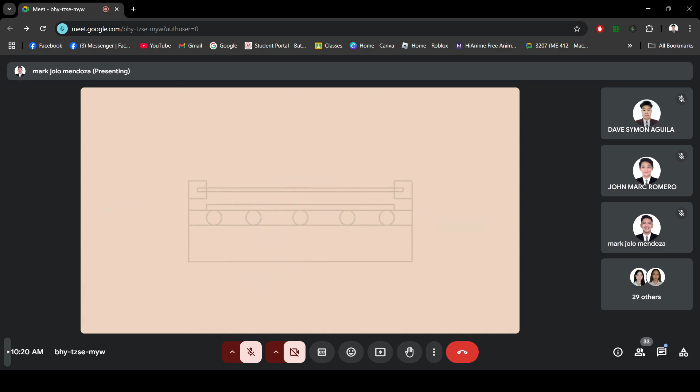Here is the video about flat plate solar collectors. The flat plate solar collectors are probably the most fundamental and most studied technology for solar powered domestic hot water systems. The flat plate collector is basically a heat exchanger, which transfers the radiant energy of the incident sunlight to the sensible heat of a working fluid, liquid or air. Here the main components of the flat plate collector are black absorber plate, transparent screen, fluid tubes, insulation, support structure.

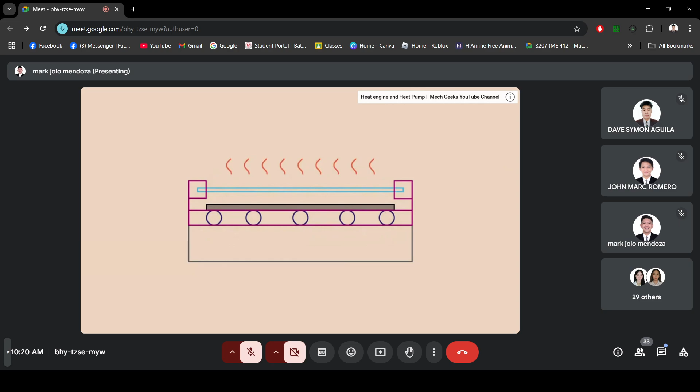Sunlight passes through the transparent screen and strikes the absorber plate, which heats up, changing solar energy into heat energy. The heat is transferred to liquid passing through pipes attached to the absorber plate. However, the rest of the energy is still lost in radiation to the outside environment. Flat plate collectors heat the circulating fluid to a temperature considerably less than that of the boiling point of water, and are best suited to applications where the demand temperature is 30 to 70 degrees C.

That's it guys for this video. Hope you understand our explanation. If you liked our video, please give thumbs up, share this video to your friends, express your views in the comment section below. And also watch our previous videos. For more content, make sure to subscribe to our channel and hit.

So, yun. That is the very simplest definition ng flat plate collectors natin. That is how it works. So, we're gonna be dealing more about it later on. And another thing that we are gonna be discussing is our concentrating solar power systems.

And one of those, kung mapapansin nyo sa module, if you check the module, by the way, si Adam, your module is with me na here sa faculty. So you need to get this, Adam, because next week we are going to be having our quiz, and half of the items in the quiz will be on your module. So if you have time, then you can get it here sa faculty.

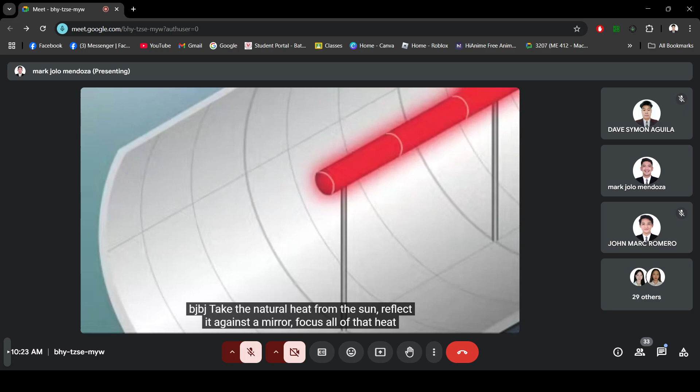Okay, take the natural heat from the sun, reflect it against a mirror. Focus all of that heat on one area, send it through a power system, and you've got a renewable way of making electricity. It's called concentrating solar power, or CSP. Now, there are many types of CSP technologies: towers, dishes, linear mirrors, and troughs. Okay, have a look at this parabolic trough system.

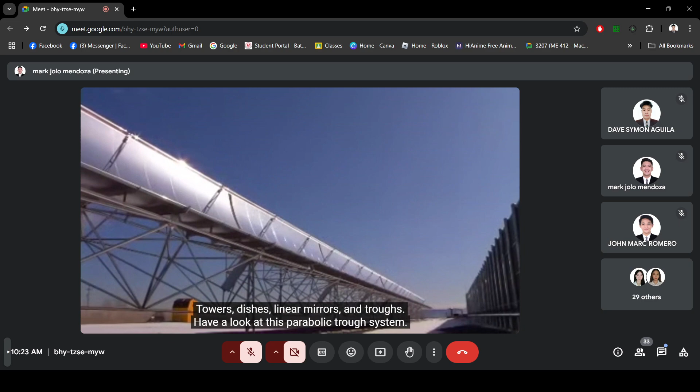Parabolic troughs are large mirrors shaped like a giant U. These troughs are connected together in long lines and will track the sun throughout the day. When the sun's heat is reflected off the mirror, the curved shape sends most of that reflected heat onto a receiver. The receiver tube is filled with a fluid. It could be oil, molten salt, something that holds the heat well.

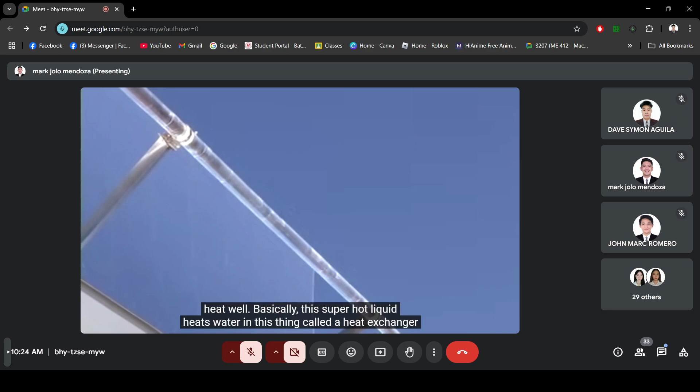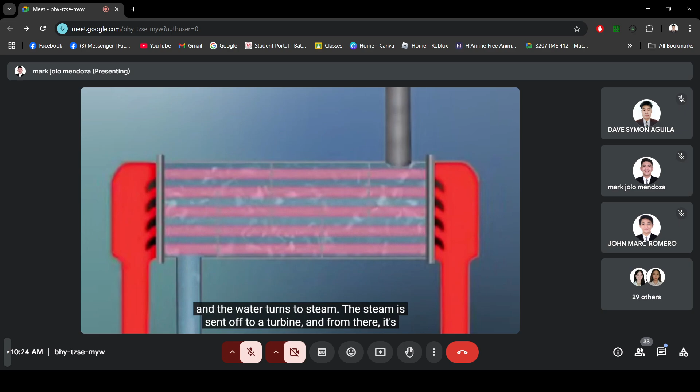Basically, this super hot liquid heats water in this thing called a heat exchanger, and the water turns to steam. Now the steam is sent off to a turbine, and from there, it's business as usual inside a power plant. A steam turbine spins a generator, and the generator makes electricity. Once the fluid transfers its heat, it's recycled and used over and over, and the steam is also cooled, condensed, and recycled again and again.

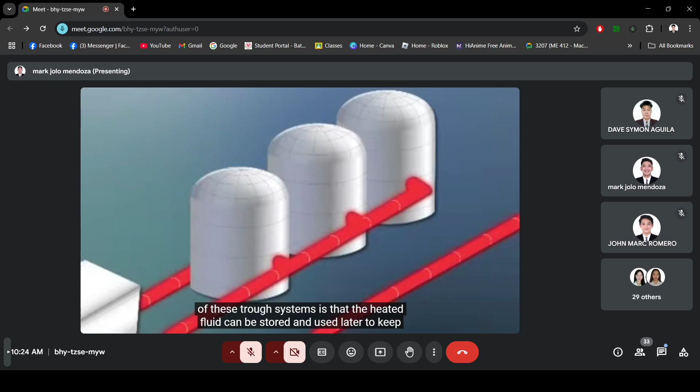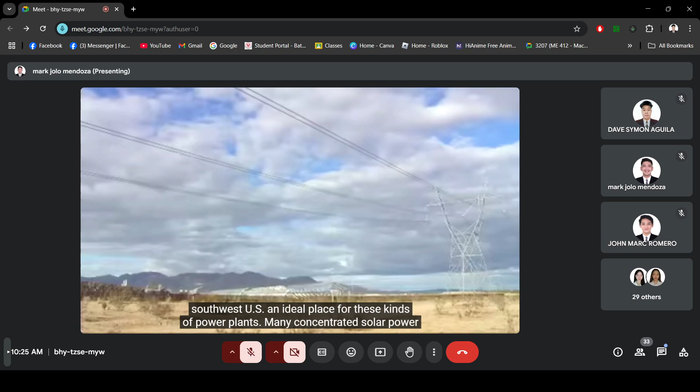One big advantage of these trough systems is that the heated fluid can be stored and used later to keep making electricity when the sun isn't shining. Sunny skies and hot temperatures make the Southwest U.S. an ideal place for these kinds of power plants. Many concentrated solar power plants could be built within the next several years, and a single plant can generate 250 megawatts or more, which is enough to power about 90,000 homes. That's a lot of electricity to meet America's power needs.

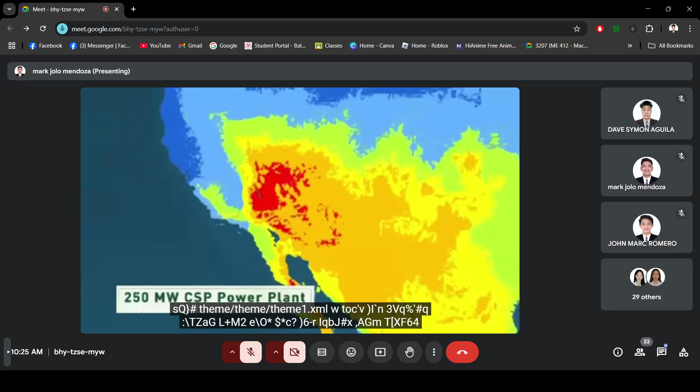So yun, that's another type. That's an example of a concentrating solar power, specifically parabolic trough system. And another type is CPC, or the compound parabolic concentrators. So ito yon.

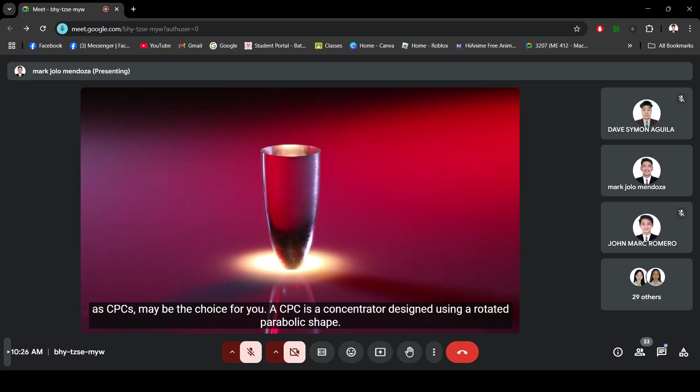Want to collect and concentrate divergent light while avoiding the difficulties associated with a multi-element system? If so, compound parabolic concentrators, known as CPCs, may be the choice for you. A CPC is a concentrator designed using a rotated parabolic shape. The wide end of the CPC collects divergent light, which is then reflected within the CPC and concentrated at the narrow output end. CPCs are defined using an acceptance angle, which is the angular range in which a CPC can collect light.

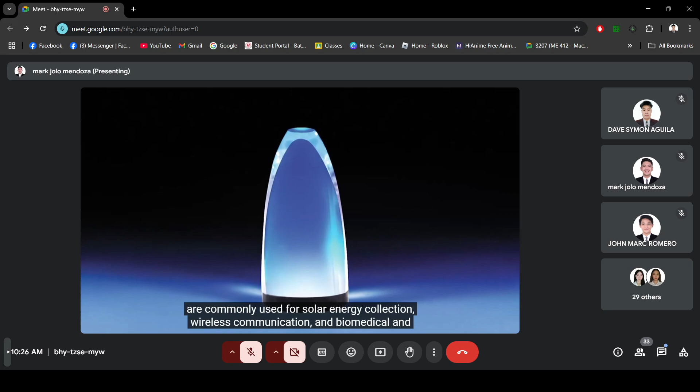CPCs are ideal for any application that requires the condensing of divergent light sources and are commonly used for solar energy collection, wireless communication, and biomedical and defense research.

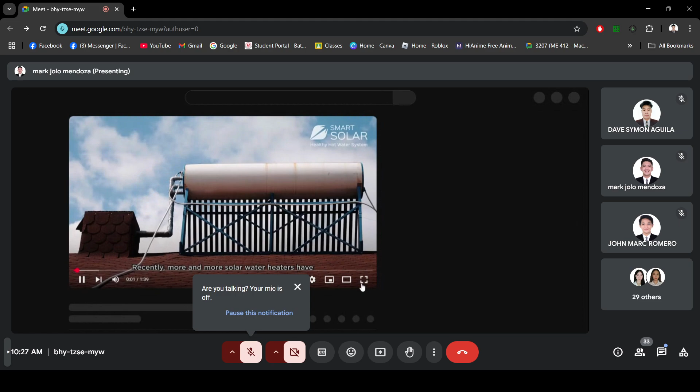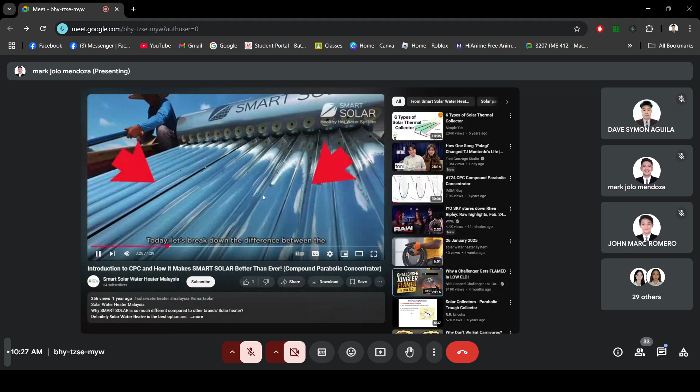Recently, more and more solar water heaters have adopted the new evacuated tube technology, a wonderful piece of tech that improves the efficiency of acquiring hot water for your home. But there's a catch. When you are choosing the right solar water heater for your home, make sure to check if it comes with a CPC. Today, let us break down the difference between the evacuated tubes with and without a CPC.

CPC stands for Compound Parabolic Concentrator. It is the curved sheet of metal placed beneath the evacuated tubes. For evacuated tubes without a CPC, the sun rays can only be absorbed from the surfaces facing the sun, leaving more gaps between each pipe and reducing the amount of heat generated. With a CPC, the evacuated tubes continue absorbing the sun rays from all around the tube throughout the day, increasing its effective surface area and maximizing the amount of heat generated.

So, now you understand the differences of an evacuated tube solar water heater with or without a CPC.

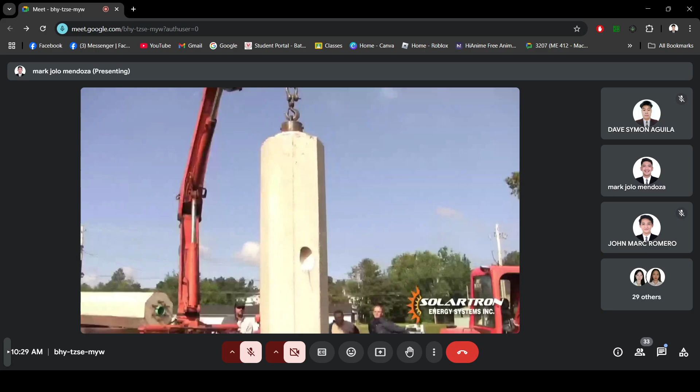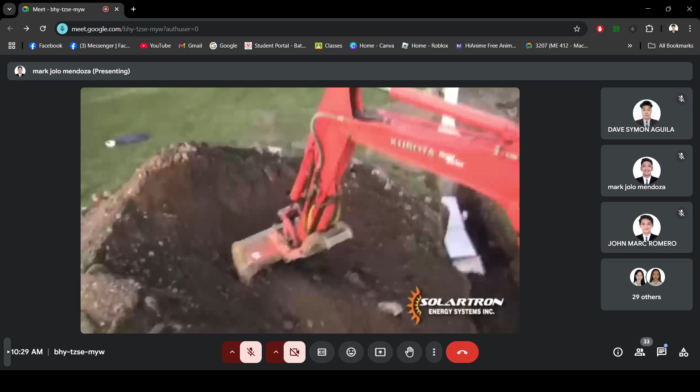Introduced the world to the first ever commercially available parabolic solar concentrator. The foundation is available as a precast system, enabling faster install time. As well, the installation does not require any copper piping or soldering due to the max operating temperature of 93 degrees Celsius or around 200 degrees Fahrenheit. The Solar Beam was built to be a modular installation, allowing components to be placed into position. The reflector dish can be pre-assembled on the ground and put into place with the boom.

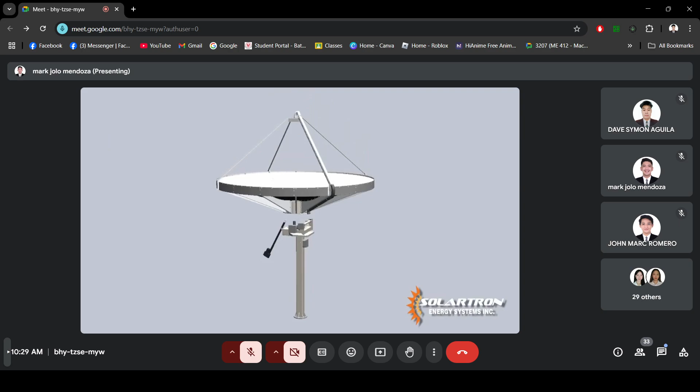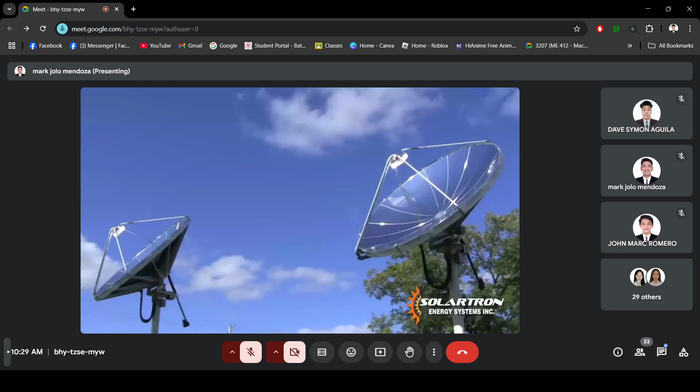The Solar Beam Concentrator is the most efficient solar thermal system available. The Solar Beam uses concentrated solar power technology that utilizes a highly reflective anodized aluminum to reflect and concentrate the sunlight onto a focal point. The Solar Beam generates peak 13 kilowatts of heat per hour, which is 44,350 BTUs. The system can reduce payback from 20 years to 6 years compared to other technologies.

The Solar Beam Concentrator's patent-pending dual-axis sun tracking system utilizes breakthrough technology to accurately track the sun. The Solar Beam does not require any sensors to locate the sun. Rather, it uses a unique celestial algorithm and GPS to track the sun regardless of the season. The Solar Beam maintains a continuous 82% efficiency from low to high temperatures, compared to flat plate panels or evacuated tubes, which experience lower efficiencies in higher temperatures.

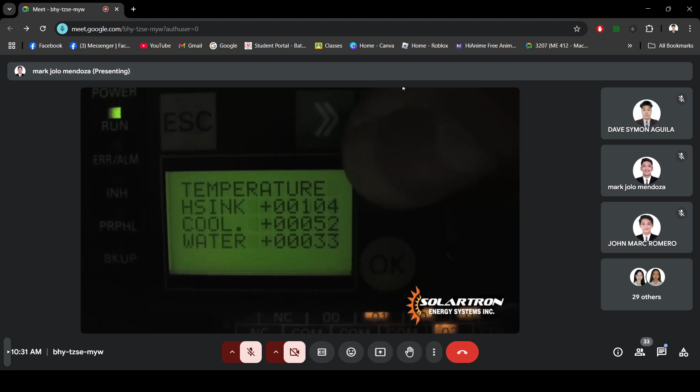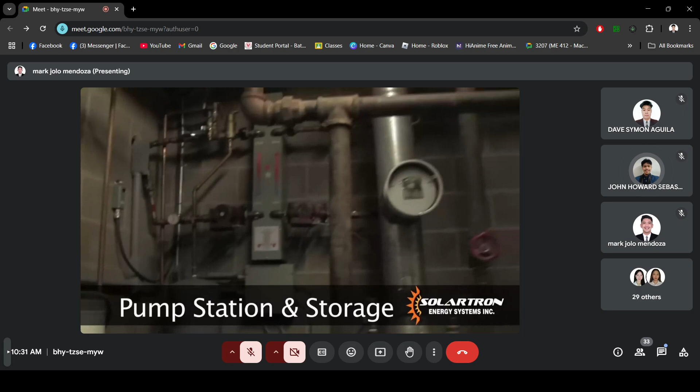Various displays are provided for calibration as well as for temperature readings. The control system is designed with industrial components ensuring the highest reliability in the field. In addition, the control system is internet ready, allowing for remote setting changes, firmware updates, and viewing energy reports via the web anywhere in the world. The Solar Beam Concentrator is the new standard for solar thermal applications.

So that one, that is a paraboloidal concentrator. The key difference between those concentrators is only in its design, but the processes are all the same. And we're gonna be discussing that today.

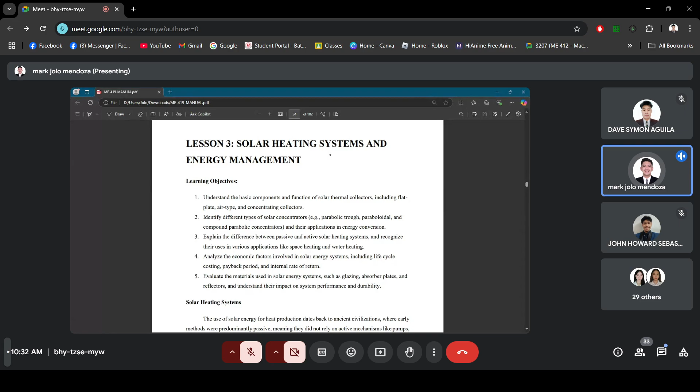But let me share my screen first. So our lesson for today is about solar heating systems and energy management. So for solar heating systems, we're gonna be dealing here with the flat plate collectors. Hold on.

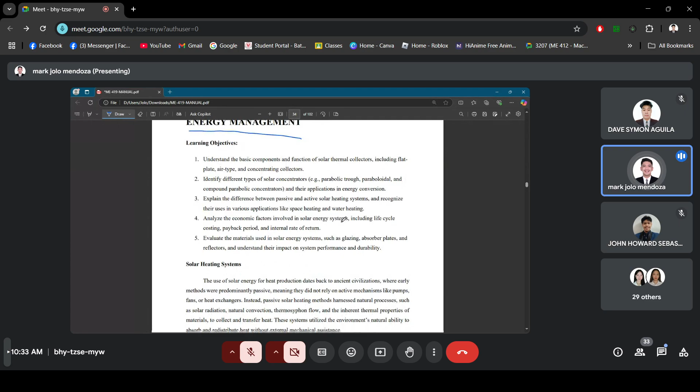Our lesson is about solar heating systems and energy management. We are going to discuss flat plate collectors as one of the solar heating systems, and CSPs or concentrating solar powers, as well as energy storage or energy management of solar energy systems. If we still have time, we'll also discuss calculations regarding solar energy. So solar heating systems - we have two different types.

The first one is the passive solar heating system. This heating system does not rely on any mechanical devices. From the word itself, passive, you do not need any intervention from mechanical devices. For example, you put a thing under the sun, so that thing will be heated as it is - that's passive solar heating. You do not need any pump or any exchangers to process the heat. It just includes natural processes such as solar radiation, convection, thermosiphon flow, and thermal properties of materials to collect and transfer heat. So the simple definition is that you heat a system as how the sun radiates heat, without any intervention - that's basically the passive solar heating method.

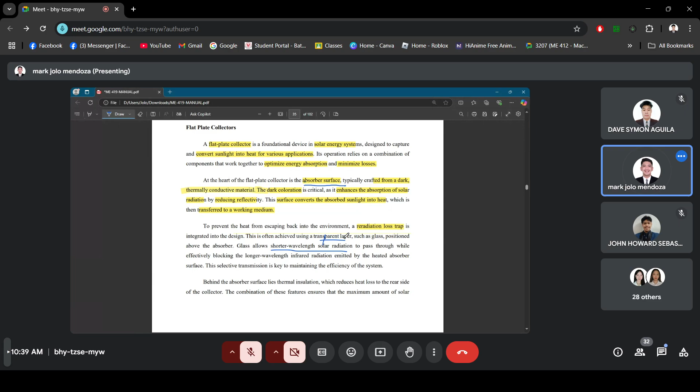We also have the re-radiation loss trap integrated into the design - these are the glazings from the video. If you can still remember, there is a transparent glass or transparent material above the absorber - that's the glazings or re-radiation loss trap used in our designs. We use these glazings or transparent layers to allow shorter wavelength radiation to pass through and then trap it inside by not allowing the longer wavelength to reflect back to the environment. That is how the radiation loss trap or glazings work in flat plate collectors. We also have thermal insulation.

Thermal insulation reduces heat loss to the rear side of the collector. This makes sure that the heat penetrating through the system will be absorbed optimally. The combination of these features ensures that the maximum amount of solar energy is retained and directed into the heat transfer medium - that is our main purpose, for all the heat to be absorbed by our absorber and then transferred to our fluid, which runs our main system. This medium, which could be air, water, or another fluid, serves as the conduit for transporting the captured heat to where it is needed. Flat plate collectors are typically employed in applications where temperatures up to 75 degrees Celsius are sufficient.

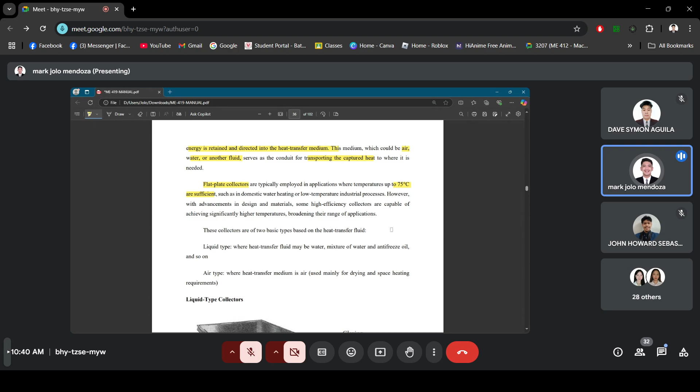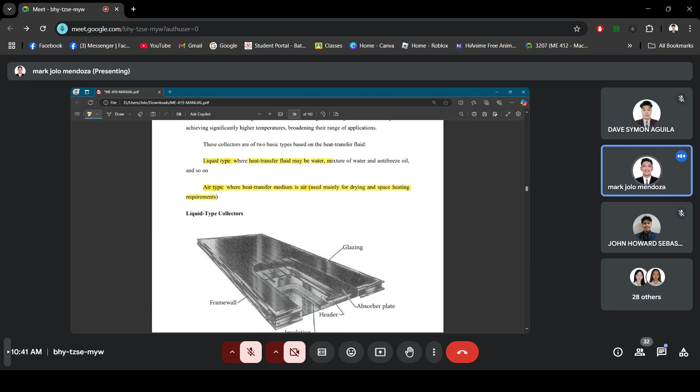So the two basic types of flat plate collectors are based on its fluid. The first one is the liquid type and the second one is the air type. For the liquid type, the heat transfer medium is water or liquid. Whereas for air type, the medium is air. The main difference is the application - it really depends on the application of flat plate collectors you are going to be using.

So the first one is a liquid type collector. Here's what is discussed. If you can still remember, the very top part on the diagram is the glazing or transparent material. This glazing will allow the solar radiation to pass through it. Since this is a transparent material, the heat will go inside, penetrating through it - all the short wavelengths and long wavelengths will penetrate through.

Once it gets passed through the system, it will be trapped inside. Because this glazing has the property to trap the heat inside, especially the longer wavelengths. It will be trapped inside so that our absorber plate, which is placed under the glazing, will absorb all of the heat that is trapped.

So the absorber plate has tubes where the fluid is flowing. These tubes will be heated because of the heat trapped and because of the heat produced or emitted by the sun. It will drive the heating process of the tubes inside these flat plate collectors.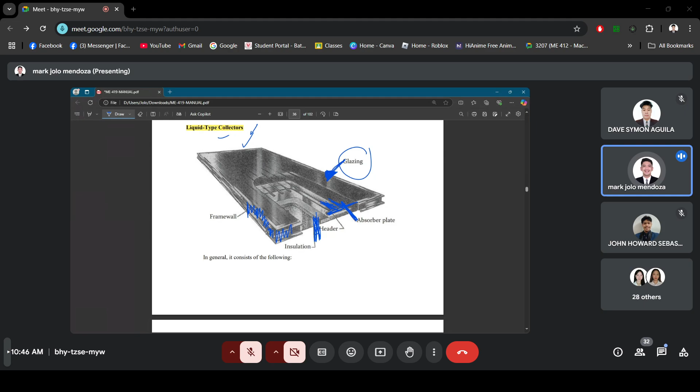Again, there are collectors which have glazings, and there are also collectors which have no glazings.

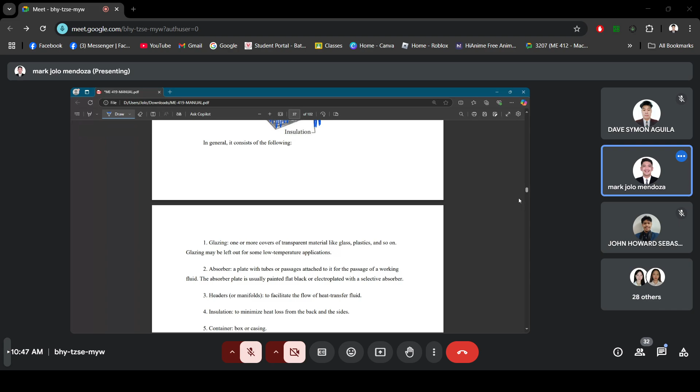So yan, na-discuss natin ito.

Air type collectors are basically a type of collector which uses air as the medium, and one of its benefits is its low sensitivity to leakage. So hindi po nagli-leak.

Though there can be leakage in air type collectors, it's not really that significant compared to liquid type, kasi the loss of air due to minor leaks does not really pose significant operational challenges, and it's easier to maintain. Kasi when we talk about liquid type collectors, if there is a leakage, it's harder and more difficult to handle.

There is water there, whereas kapag air lang siya, syempre air is present everywhere naman, it's easier to handle, especially if it escapes from the tube, medyo contained pa din yung pressure niya. So that really does not affect the operational process when there is leakage from air compared to liquid, because again there is only a slight difference with the pressure, kasi konti pa lang yung umi-escape kung meron mang leakage.

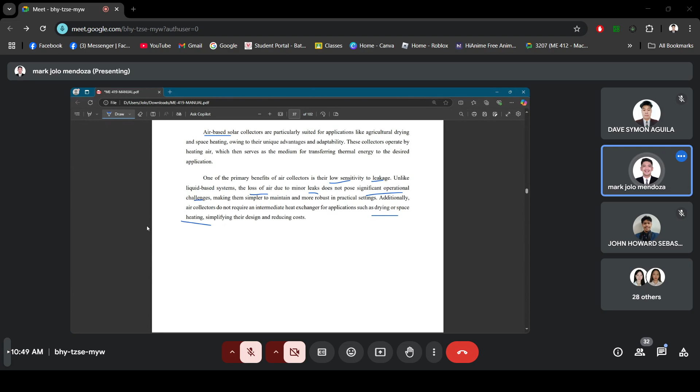The main usage of air type collectors is for drying or space heating. We use air type collectors for those kinds of things. But if we are going to use liquid type collectors, this is commonly used for power generation, kasi we need to have steam, we need to generate steam.

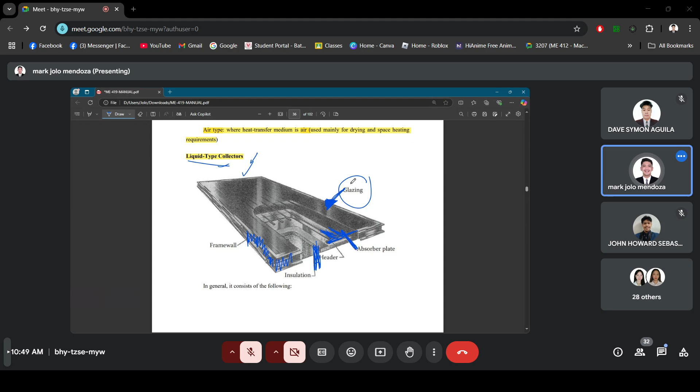Then glazing, this glazing or transparent cover, this is part of the system design, serves as a dual purpose. It allows the entry of shorter wavelength solar radiation while effectively blocking longer wavelength radiation from the absorber plate. Again, the glazing is the transparent cover at the top of the flat plate collectors. This serves as a transparent thing that allows the heat to pass through it, and once it passes through, it will trap the heat inside as well.

It will trap the heat, especially those with longer wavelengths. So yun, ginagawa natin to enhance the collector's thermal efficiency. And glazing minimizes heat loss through convection from the top of the absorber plate.

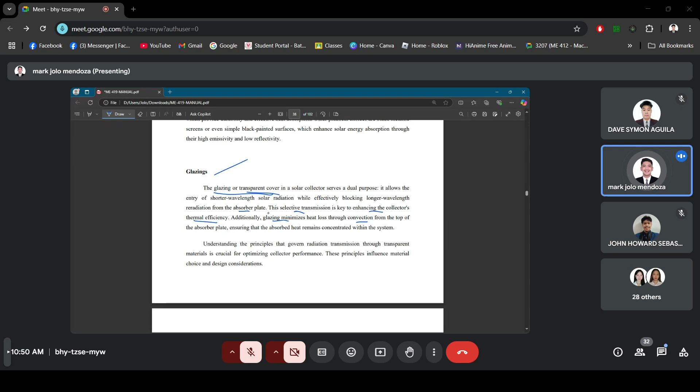The common or commonly used glazing material is glass, because mataas nga yung transmittance niya. Again, transmittance from our previous discussion is the ability of a material to make the heat pass through it. So it has a high transmittance, but while trapping longer wavelength infrared radiation effectively.

Ibig sabihin, if those things get penetrated inside our system, then all of those will not be able to escape as well because of the properties of glass. So if that's the case, then all of the heat will be able to be utilized by our collectors. That is the reason why transparent glass is used as a glazing material.

But there are times that they use transparent plastics. If we use transparent plastics, we have to consider its durability, because plastics exhibit higher transmittance in the longer wavelength solar spectrum, which really is a negative thing kasi it reduces the efficiency, because we need these longer wavelengths to be trapped inside. So it's better to use glass talaga.

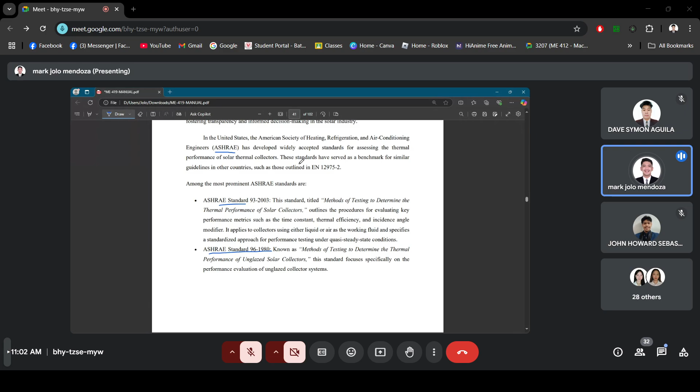This is just for the unglazed solar collectors, kasi before they do not utilize glazing. So ito yung standard dati, but this is still being considered or still being tested because there are still designs na hindi gumagamit ng glazings ng ating thermal collectors. So that's it for our flat plate collectors. Yun yung composition niya. And the other type of solar heating system is the concentrating solar collector.

So what is this? From the word itself, concentrating, it just means yung ating heat from the sun will be concentrated into a specific point. Ibig sabihin, all of the heat will go there to a specific focal point. So that is concentrating solar collectors. And the most common term here is the CSPs, or the concentrating solar power.

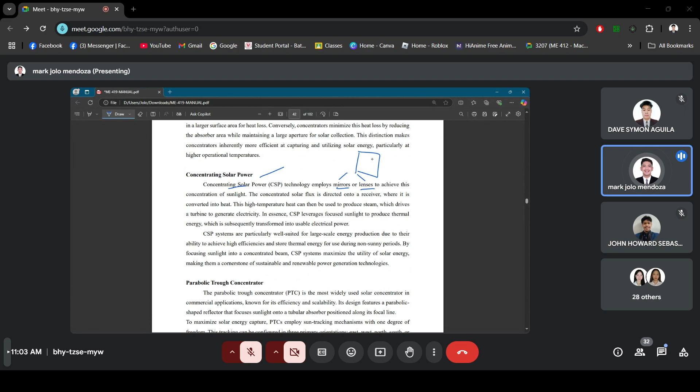So based doon sa pinanood nating video, lahat ng napanood natin kanina na concentrating solar power uses mirrors or lenses, because mirrors, 'di ba, are able to reflect the heat. So for example, here is the mirror, then this is the sun. When the sun ray hits the mirror, then yung heat natin will be reflected back.

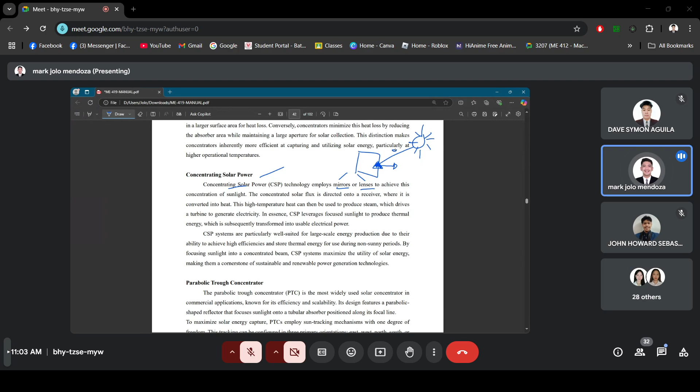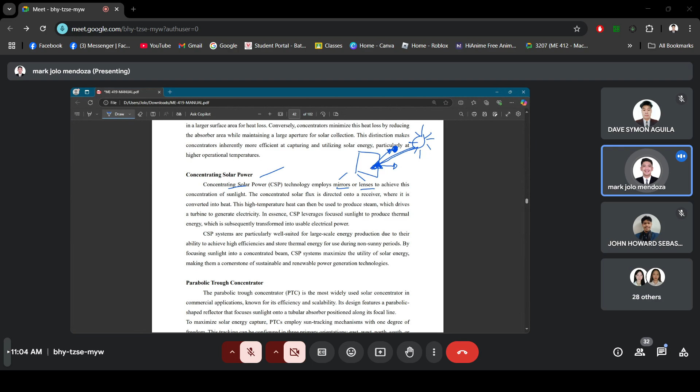For example, nandito yung ating focal point. So once the sun rays hit our mirror, tatama siya dito sa focal point. Yung design ng mirror natin, yung pagkakapwesto niya, lahat ng heat na yun magre-reflect papunta dito. So naka-design yan. It depends on the design of our CSPs. So all of the heat will be concentrated into that specific focal point.

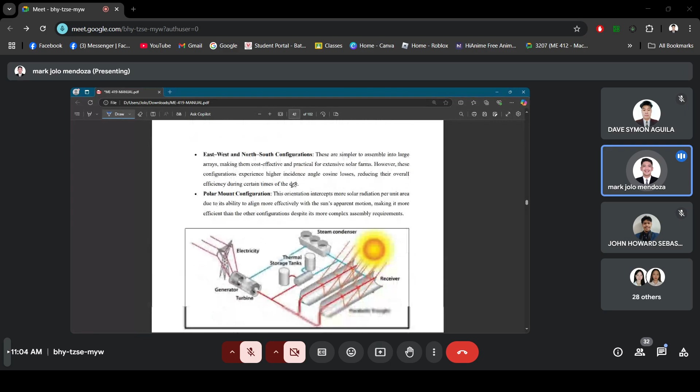So one of the types na nakita natin sa video is the parabolic trough concentrator. So ito yung nasa video. As you can see, this is a parabola, a parabolic trough. Ganyan yung design niya. The focal point here is this tube. Ito yung receiver natin where the fluid is flowing. Ito yung tube natin.

Kung mapapansin nyo, the sun rays hit the parabolic trough, which is composed of mirrors. When it hits the surface of the mirror, based on the design, all of the heat will be reflected towards the receiver. And again, that receiver is our absorber. So all of the heat will be able to hit the fluid inside our tubes. So ganyan yung design niya. This is the process.

As you can see, the sun also hits the tube. If it directly hits the tube, then it's already good. But to utilize the heat effectively, we utilize mirrors sa parabolic trough so that all of the heat will be transferred to the receiver as well. When that receiver gets enough heat to superheat the fluid and make it steam, that steam carries a lot of energy and will power this turbine. It will make the turbine rotate, coupled to a generator to produce electricity. So that's basically how the parabolic trough concentrator works.

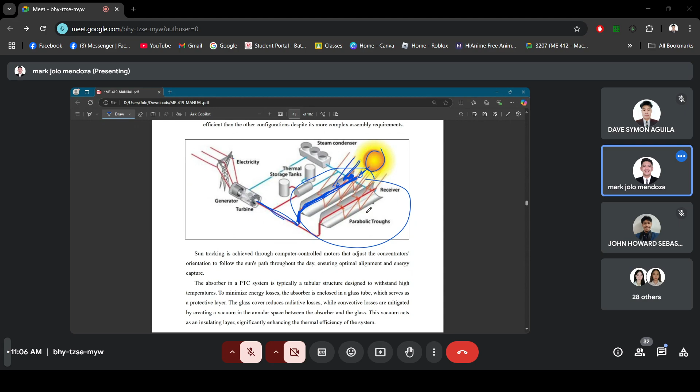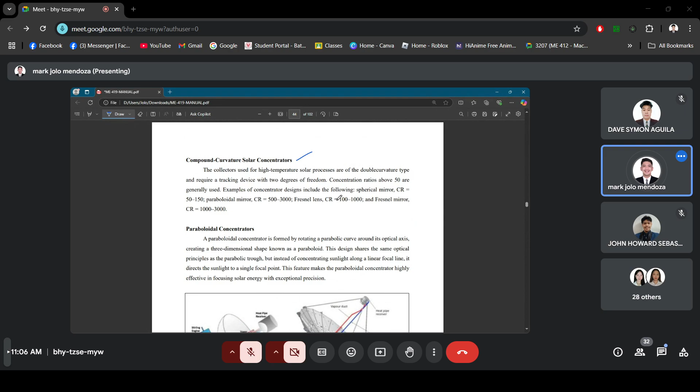Then when we talk about compound curvature solar concentrators, this is basically a combination or a more complex design. Same goes with this, the paraboloidal concentrator. The main difference is that ang paraboloidal concentrator natin, the design is in this shape. That is the reason why this is commonly termed as the dish Stirling concentrator. Why? Because first, the design is dish shaped,

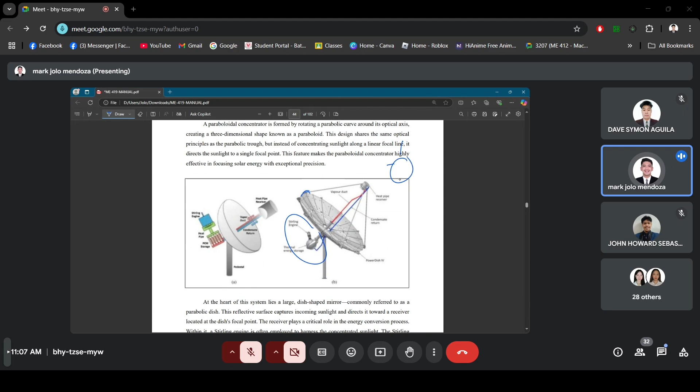and this is running with a Stirling engine. I hope you are familiar with the Stirling engine because this has been discussed in your combustion, or in Thermo 2 if I'm not mistaken. So yeah, it works with a Stirling engine. Same process with the parabolic trough concentrator. For this paraboloidal concentrator, for example, the sun is here, then it will hit the surface here.

It will reflect or it will hit the surface here. Then this is composed of mirrors, so it will reflect the heat to this. This is the receiver. So all of the heat will be able to transfer or will be able to go here.

Then that heat will be transferred to these lines here. All of that heat will be able to go there since it is already concentrated. So all of those will be going there, and that heat will be able to make our Stirling engine work to generate electricity. So that basically is the process of paraboloidal concentrators.

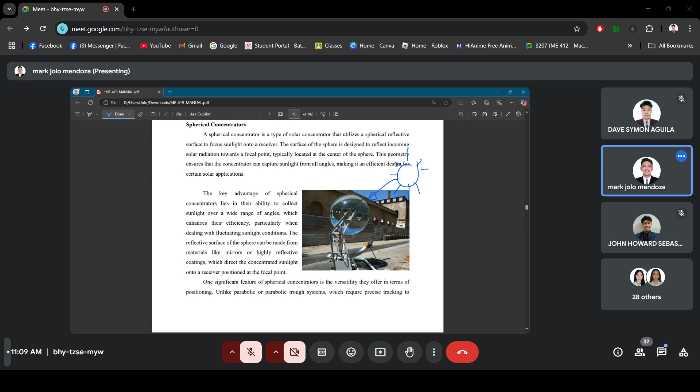Then spherical concentrators are basically the same as the paraboloidal concentrator, but researchers think that this is more advanced because, for example, the sun is here. So if the sun hits the surface of the sphere, then it will reflect back on this. This is the main receiver.

So it will go there, and the main difference of this from the paraboloidal is that they consider the back part where the sun really does not hit it. But in that case, because of this spherical design, this will also be able to reflect the heat to go here. So that is how spherical concentrators work. Basically the same as other concentrators, it's just that the design is spherical.

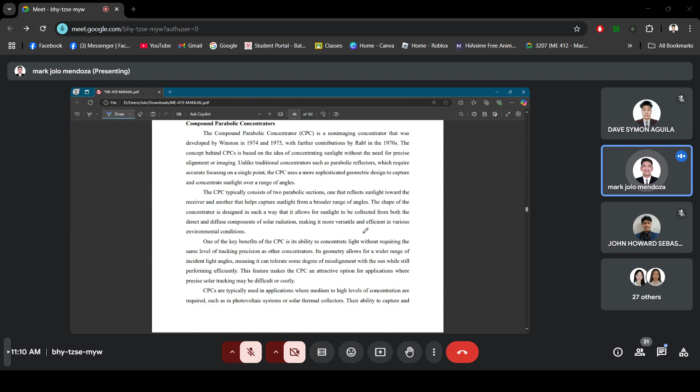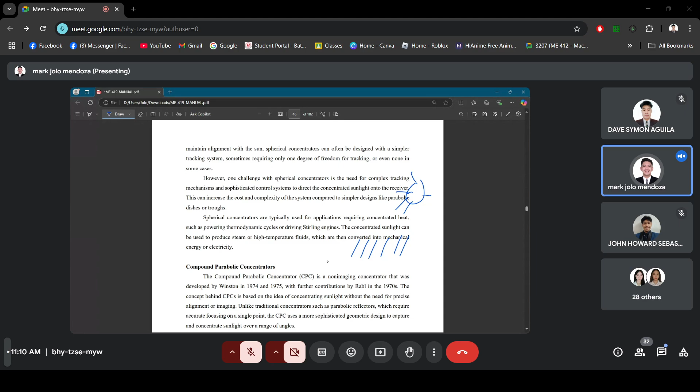Then lastly is the compound parabolic concentrators. If you can still remember on the video, these are commonly placed under the tubes. So in our tubes, for example, this is our absorber tube. The sun will be able to hit the tubes directly. But of course, there will be parts where the heat will not really hit the tubes. For example, there are spacings here, so it will go through that space.

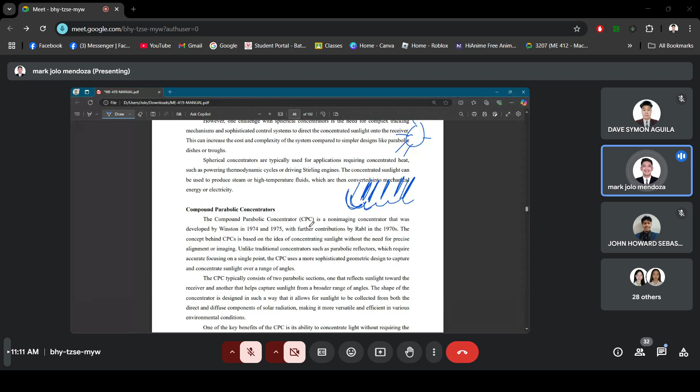So the compound parabolic concentrators are placed underneath these tubes. So all of that heat will be reflected back to the tube because of our compound parabolic concentrators placed under the tubes. So that is how compound parabolic concentrators work. Then those are the types of concentrating solar power. Again, we discussed the flat plate collectors and concentrating solar power. So yeah, that's it.

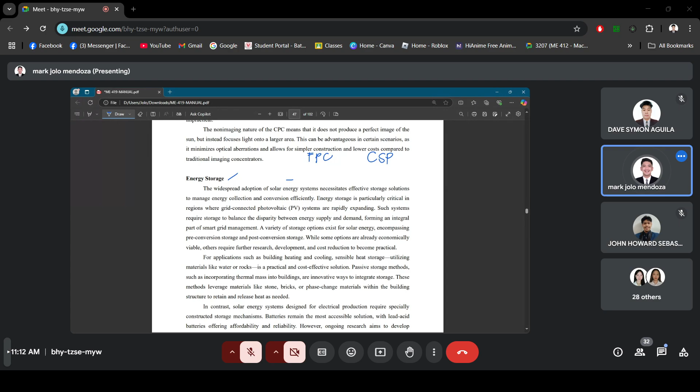Then for energy storage, this basically means that we need to store the energy because we cannot always process the heat or energy, because the sun is not always present. I mean, the energy is not always present. So we need to utilize energy storage so that even if there is an excess, we can still use the energy produced from the sun.

So basically that includes using batteries or storage tanks, and also we use a grid connected PV system. Some of our PV systems are connected to grids because when it's connected to the grid, it makes money out of it. It depends on the metering system. For example, if it's connected to the national grid, each kilowatt of energy we produce is equal to money.

And if this is grid connected, then they will be the ones to handle the energy, whether it's going to be used for reserve or as the main source. So it depends on them. That's the main advantage of grid connected: they will be the ones to facilitate the energy you produce. So that's it.

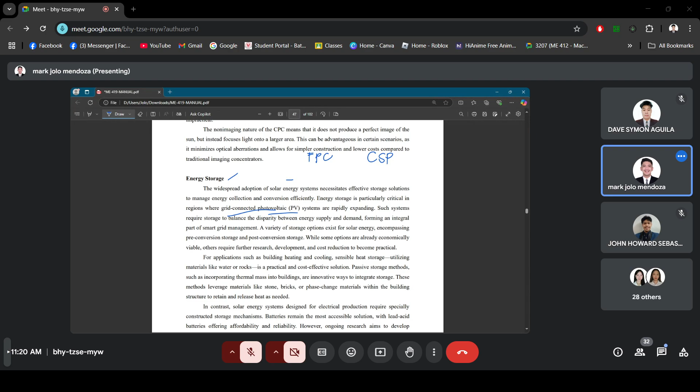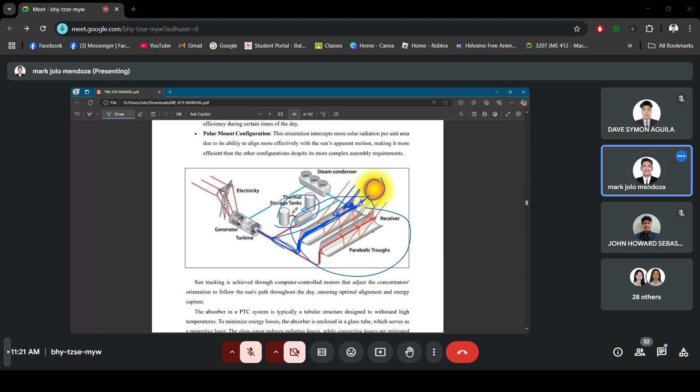So if there's no more heat, or there is a lesser amount of steam na, kasi for example gabi natin siya ipaprocess, then we can use the stored energy from the process that we had earlier. So that is how we integrate storages sa ating design.

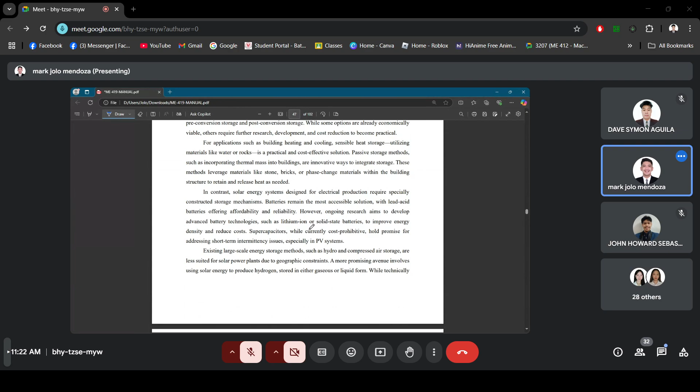And then for the economics, syempre, we always have to consider the economic basis of our design. The economics will make or break your design. Kaya nga yung iba, there are some investors that really do not invest on solar energy systems because the knowledge about this is lacking, because they believe that a solar energy system is not really a good thing to invest on because of its low efficiency.

But with the right knowledge and with the right orientation, this will be able to make the energy supply or the energy demand from the earth be sufficient. So what are we gonna be considering in economics here? Syempre, we have to be able to identify the life cycle costing. You would always consider this, and more of this will be discussed on your economics subject naman. So we will not really delve into this. Just a brief background.

So syempre, initial cost, this includes the costs of your equipment, the construction, installation, and land acquisition. This is basically the costs for your system during the startup of your system. Then the operating cost is the cost to operate the system. Then interest charges, syempre, you will consult a lot of financing companies

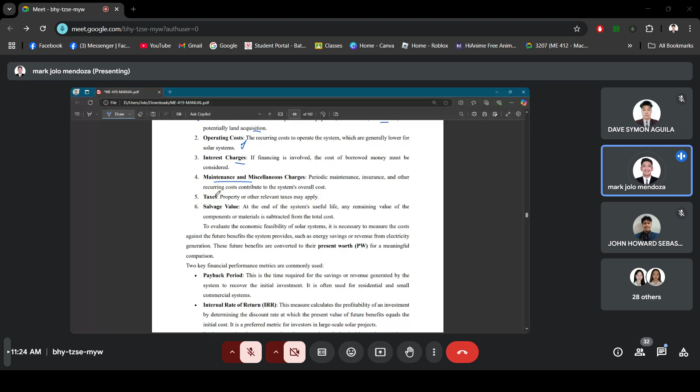And then syempre, hindi natin maiwasan din ang maintenance and miscellaneous charges, then the taxes, but taxes are subject to change because there are certain laws that prohibit the payment of taxes. For example sa Pilipinas, may ibang companies that do not pay taxes regarding solar and wind energy systems because nakasaad sa batas na if you are gonna be doing renewable energy systems, then you are exempted from tax. So it depends if you will fall under that category.

And if we talk about salvage value, this is the amount of your system after its useful life. So paano po nangyayari yon? Ito ay minaminus sa total costs na nagastos mo. Kasi for example, magbigay tayo ng example, kuwari iPhone 16.

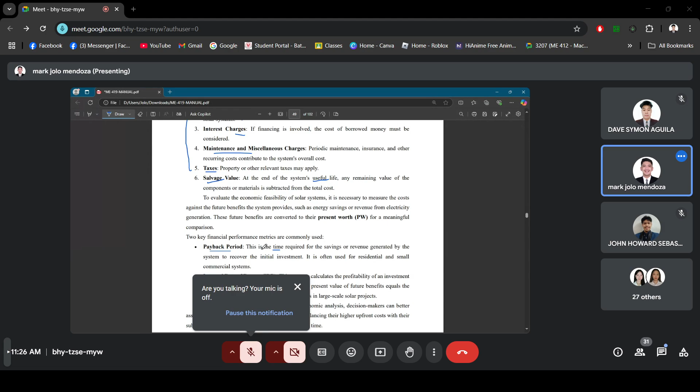Then from the succeeding days and years, puro kita na lang yung lahat. That's already revenue na lahat yon. So that's the break-even point then. That's the payback period, that time where you get your money back from your investment. And this is one of the main concerns kasi they believe that investing in solar energy systems have a higher payback period compared to other thermal power or compared to other energy generating plants.

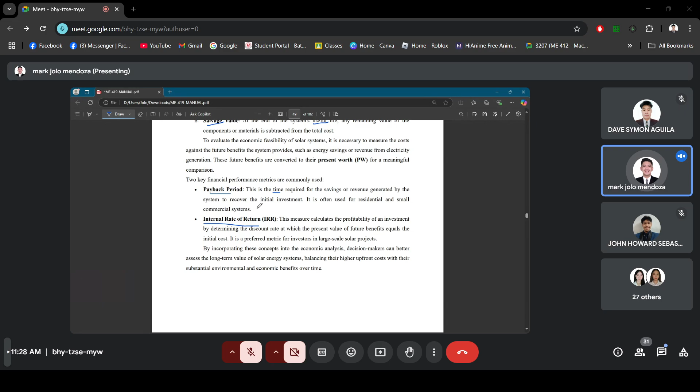That is the reason why hindi nga masyadong tinatangkilik or they do not trust solar energy systems because of the longer payback periods, but with the right knowledge and with the right process, then this could be good, as well as the internal rate of return. So syempre, a higher rate of return means the shorter the payback period. We need to have a higher internal rate of return, so we can have a shorter payback period. So yeah, that is the key performance metrics when we need to invest and design a solar energy system.